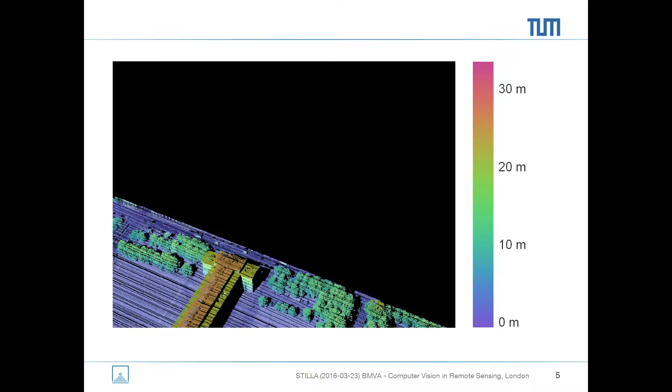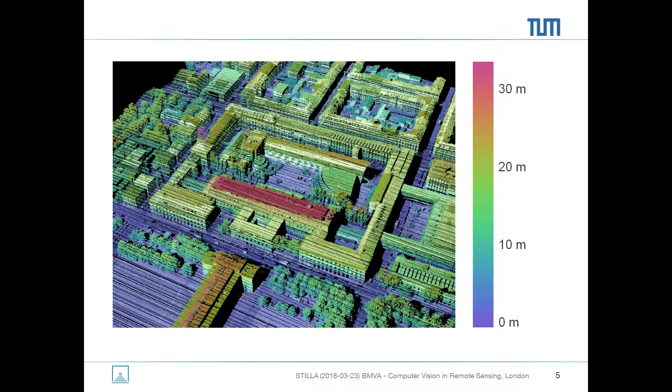The very special thing here, which is not very common in remote sensing photogrammetry, is that the laser scanner is not looking downwards in a nadir view; it's looking in a forward-looking way, which is typical for military applications, for example, obstacle warning systems. What you can now see here is a scan, and what we see is our technical university, and that is about the velocity at which we are flying over the terrain, and here different heights are color-coded. You can also see, for example, this is my office here. This is the window. It's my office.

Very interesting in this laser scan is that in the oblique view you are able to see the facades and the roofs. Facades and roofs. But the drawback is that you have shadows due to the oblique view. And now the question comes up, how can we fill this 3D point cloud? This can be filled by multiple views, by multiple flights.

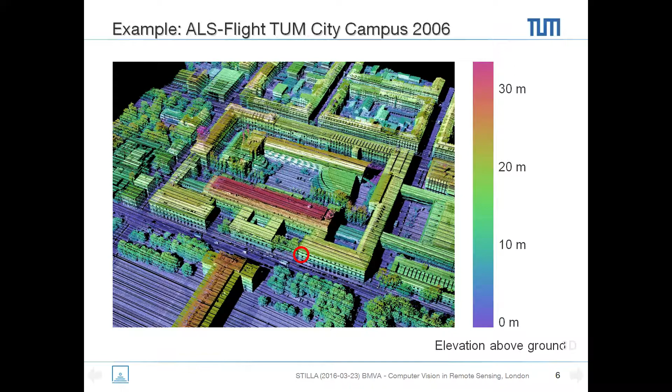We had here a cross flight from different directions, and if you have multiple observations, in this case four, then the problem comes up that they do not fit exactly together. And co-registration is very important for change detection. Otherwise, each change is caused by a point which is not at the correct position. You can see here the four flights with four different colors. That is the clock tower here on the left, and you can see a profile here. Here's my office. The profile from the building does not fit exactly together.

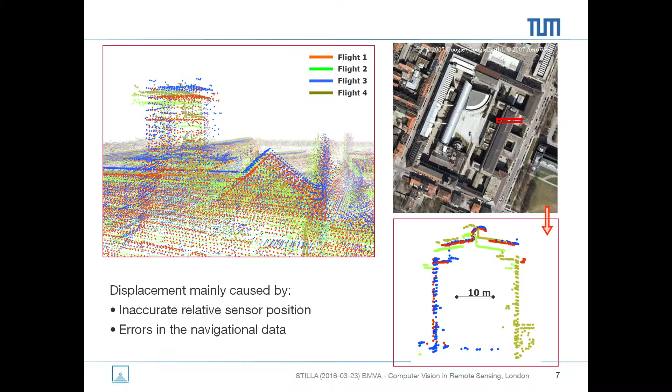So we are looking for methods doing an automatic co-registration from these displacements, which come from inaccurate relative sensor position, meaning from the sensors, IMU, GPS, and the laser scanner, and/or errors in the navigation data. So for doing this co-registration, we need some tie points or tie faces, and for that we first have to classify the scene. So what we are doing first is trying to find the ground level by a region growing algorithm, here in blue.

Next we are trying to find the facades and the roof structures. We try to fit planes into the roof structures by a RANSAC algorithm, and when we are not able to fit planes into the point cloud, then we know that's vegetation. So we have four classes, and these four classes are just for finding where the roofs, the roof faces, are.

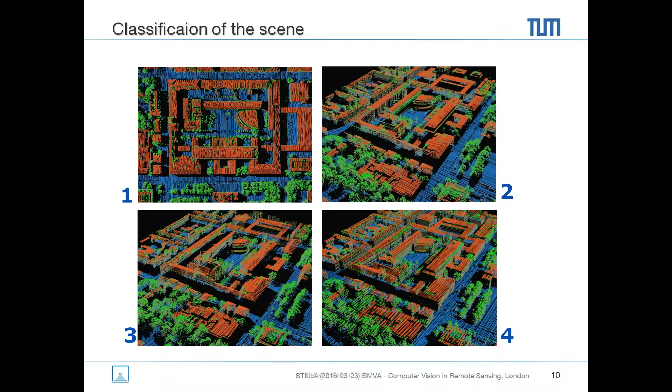You can see this for the 4 different views. You see that these are 4 different views because the shadow situation is different from the 4 flights. Now we are taking the roofs, and if you have 2 roof planes and intersect them in space, then you have a line. If you have a 3rd roof plane, then you have a virtual intersection point in space, and you can use this virtual intersection point as a tie point to combine with the other point clouds. That is done automatically, fully automatically.

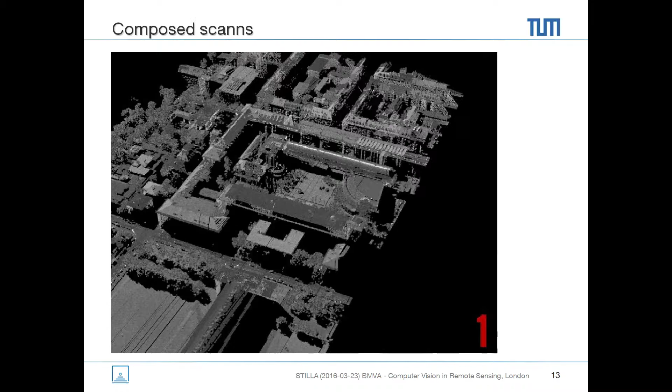So finally, you can see here the scan. The first scan comes from south to north. The next scan with the co-registered point cloud from north to south. Here the facade is missing. Here also some structures can be seen because it is a little bit side looking. Now here the facades are coming from west, and the fourth comes from east in this direction.

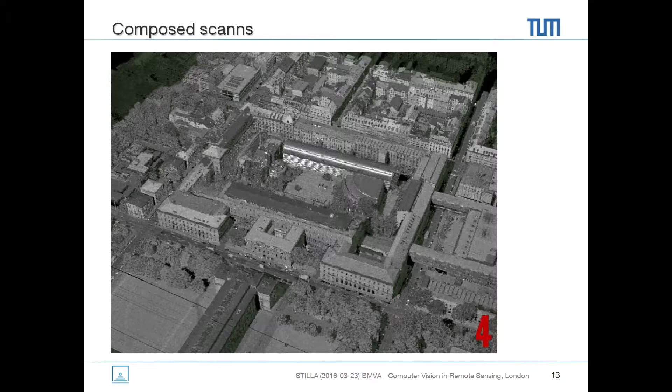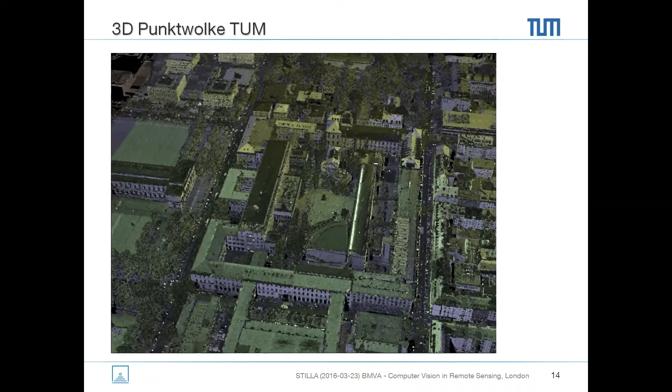Now you can see in the next scan we have a complete point cloud. You can also see the windows in the scene. So we are able to get such a point cloud, and you see different colors, points coming here from the different views. Here in yellow, and all the others green and light blue, the different colors. You're also able to look below the bridges here, and that is completely different from what we have in classical laser scanning.

So now let us assume that we have a situation that we have created such a database at time step T1, a not time critical situation. We have multiple scans. We do an automatic calibration of the sensor system during the flight. It's possible to do it during the flight. We have offline data processing, and we do a coarse classification of the scene into vegetation, buildings, ground, and so on. We have very good GPS data. We can also build up a reference station.

Now we have this database, and we are coming to the situation T2, probably after a disaster, or we have a special task, flooding, I don't know, fire, and we have a helicopter UAV mission. We have a forward-looking sensor, which is typically used for obstacle avoidance. We have degraded GPS accuracy, probably no reference station close to that. We have a scan line method. We are processing the data while it is recorded, more or less along the scan line.

And what we want to do then is the data alignment, and if we are able to combine the data of the second scan with the first data, we can also do an automatic navigation of the carrier, because we can use this co-registration data for navigation. So the final task now is a comparison, change detection. Typically, with classical approaches, for example digital surface models, they are interpolated, put on a 2D grid. That works best with nadir view because we have more or less no occlusions by the buildings. We can update maps and can compare point clouds, but all other information about the point clouds gets lost. I explain it in the next image a little bit better.

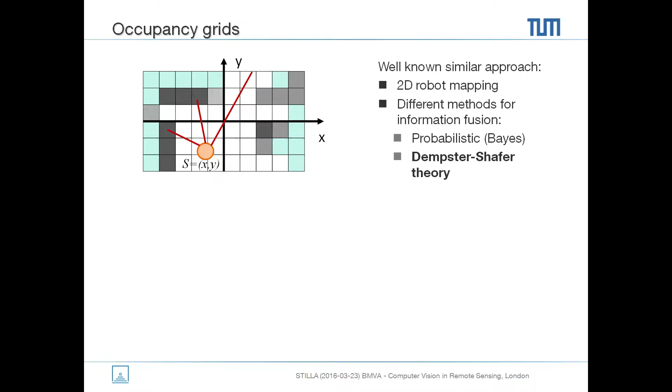We start with a so-called occupancy grid, which is well known from 2D robot mapping. There are different methods to use that. You can use it by a probabilistic approach. We have used the Dempster-Shafer theory to combine the information. And in contrast to what is done typically in 2D robot mapping, in our approach we are working in the 3D world. We have 3D grids, and the cell size is comparatively wide because we use the cells just for the search structure. The search structure I will explain in the next slides in a little bit more detail.

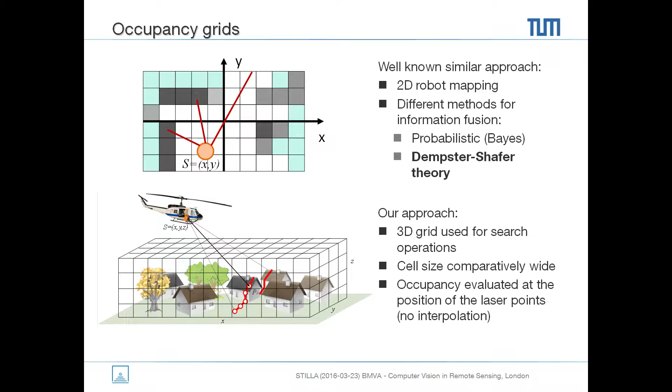We formulate it in that way that in case that we found a point, we have a certain uncertainty for this point, which is given typically by the laser footprint size, by the energy distribution, by the point position and accuracy, and so on. We can say we expect here an event, an object, a point, and we can also say that the way before must be free, otherwise we haven't seen that point.

So we have here a confidence for the empty space, we have a confidence for the point itself, and we have a confidence for what is unknown. All these other things are unknown. We can say nothing about that. So we are working with these three data sets, or these three states.

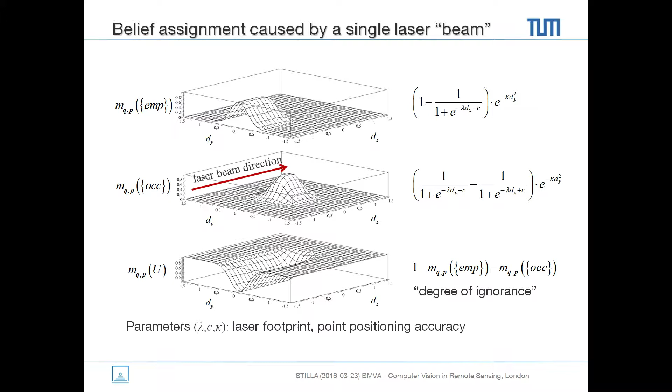In this theory, the Dempster rules of combination, we can combine different observations, for example, from two rays, without going in detail, in a very easy way. Because this theory delivers the combination and the fusion of these different spaces for the occupied space as well as for the empty and for the observations along the laser beam.

So we are storing a set of indices where there are laser points in these cells, and we also store the indices of the laser beams that traverse these cells. Both are just used as search structure to find other points. So we have index fields, and we know, in case that here is a point and another point in the same cell, then we have to consider both points in this theory. The same is given when we have different rays along this voxel, to find neighboring or intersecting rays more or less in space.

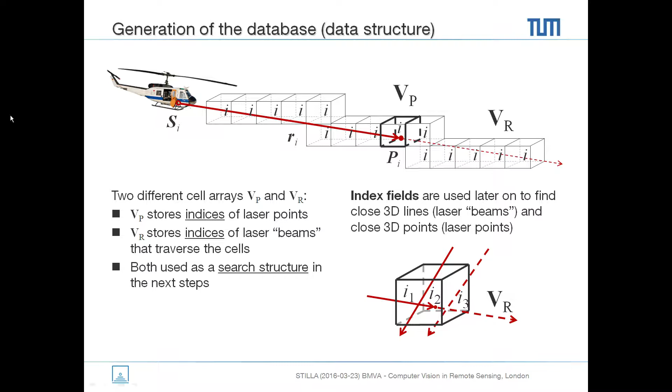The basic idea now behind is the following. When we have this search structure, we are formulating the change detection by conflicts. That means, in case we have seen a point by a sensor, and before this space was empty because in the first observation there are rays, then there is a conflict. When I see here a ray in the first observation, T1, then in T2 I see here a point, there is a conflict, we call that conflict type 1.

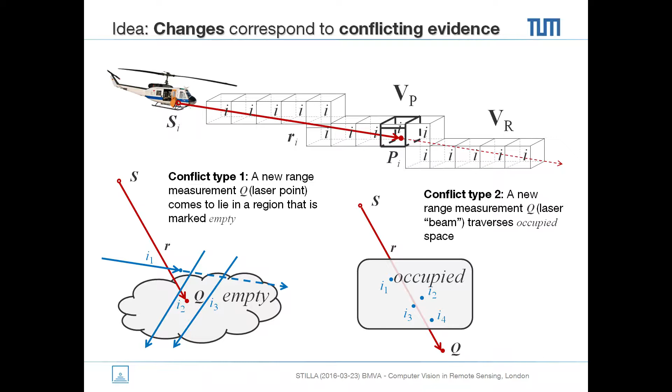Conflict type 2 is the following. We have seen an occupied space, a volume, but now we are able to see a point which requires that the beam has traversed this occupied space. So there's a conflict. We call this conflict type 2. The combination of the different observations is done by the Dempster-Shafer theory. I want to show that with an example.

We have 6, 7, 8 spots in Germany we use. One of my favorites is Abenberg, a small village, which was taken in 2008. In April, we have the combination of 4 views. We have 4.5 million points, and we have here a cell size of 2 meter by 2 meter for the search structure. 1 year later, but in August, we have a flight over this same terrain, and we are interested what has changed. And we have just 1.5 million points because we are on one flight over the terrain.

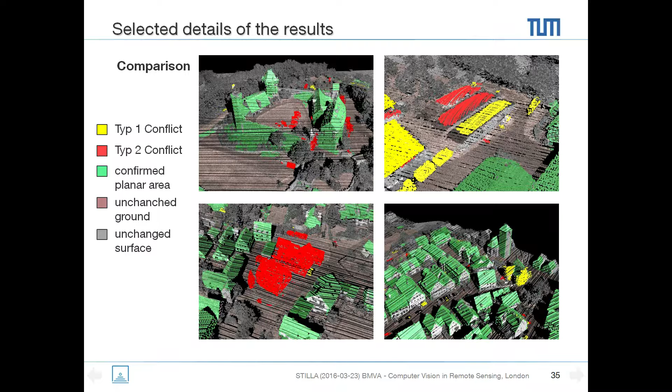This was the first example about change detection. We are on a level where we said we are not interested in an object, we are just interested in the changes in the point cloud.

So the idea behind that is this ProgressTrack, a research project. The operating sequences of a building project are extremely dynamic, and we have selected this issue to find and develop methods for the changes. Especially we have the difficult, predictable boundary conditions, the weather in the building project.

We have strong dependencies on single process steps, which is a little bit different to other manufacturing lines, for example the automotive industry. On the construction site, you need first this structure, then you can build the next structure. The acquisition of the actual construction progress is essential for cost controlling and organization of the further working schedule, and up to now these construction sites are manually inspected by a site manager and documented by a handwritten construction diary.

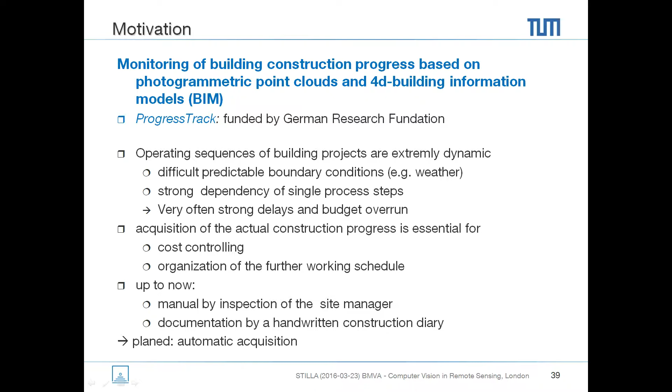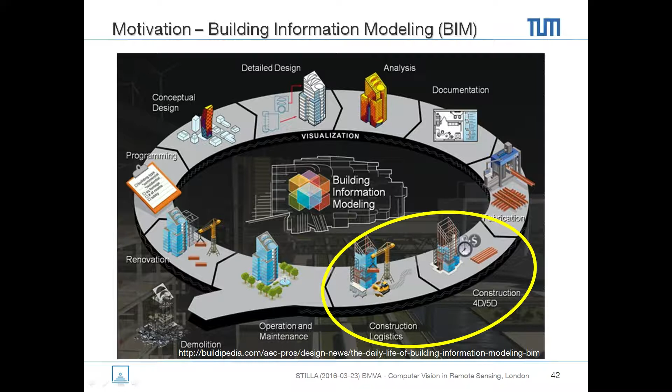What we are planning is an automatic acquisition. This can be seen in this life cycle of the building information model, which starts with programming, conceptual design, detailed design, analysis, documentation, fabrication. Here we have the construction and the logistics, and this is the part of the building model we are interested in. 4D construction means with time, 5D with money, and the construction logistics.

So we have on one hand a BIM, which gives us the as-planned state with a schedule, the 3D geometry and object attributes at a certain state, TI. At the same time, TI, we are able to monitor this construction site by photogrammetry: data acquisition, image orientation, dense matching, co-registration, so that we have a 3D point cloud.

Then we have to compare the 3D point cloud with the model. In case the comparison gives the result okay, then we go on to the next step. In case it is not showing the same situation, we probably have to change the schedule of the building construction process. I will show that with one example of what we have done in Munich.

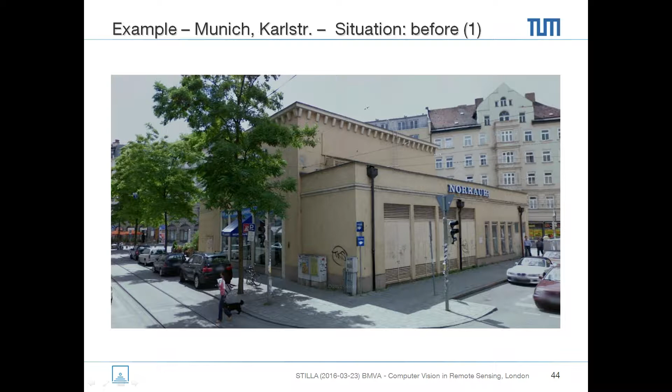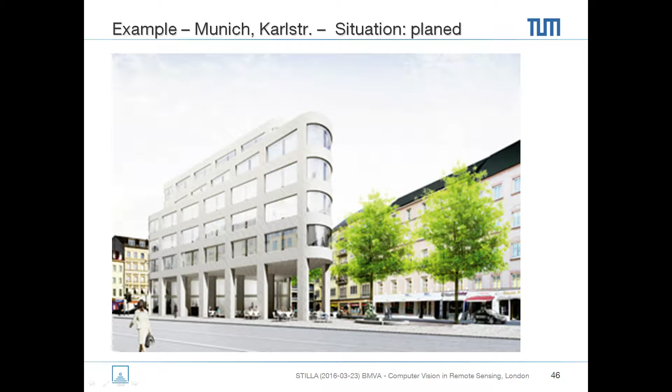This is a building very close to the main station, just a 5-minute walk between the university and the main station. Looks not very nice. You see here a different view. So I don't know who decided to build a new building here. And the architect's plan: here we need such a nice building. So they planned this building, and after some months they started with the construction. Means the old building is away, and they started with the ground level work.

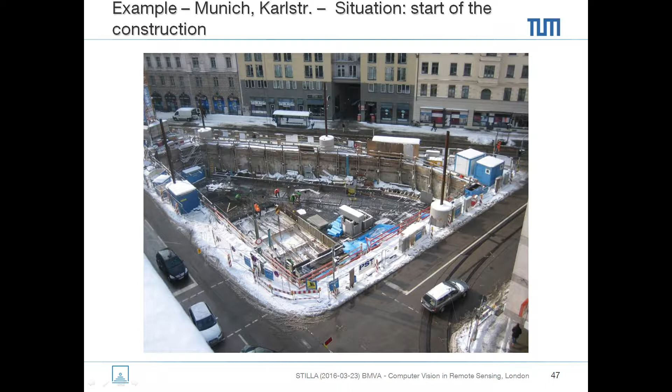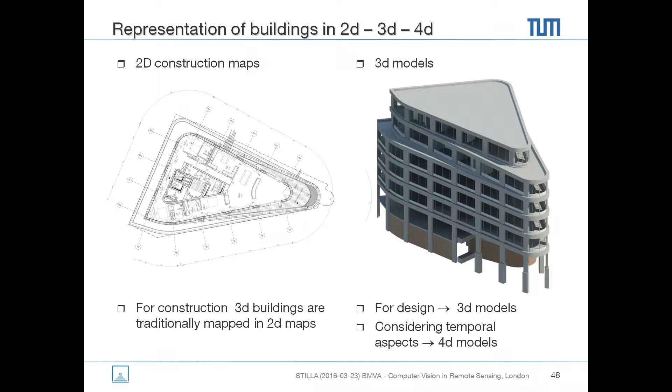Well, typically they are working on the construction site with 2D maps. So everything is on 2D maps. You see all the levels of the building for the construction, but the planning is done in 3D. So the question comes up, why not use this planning information, the 3D model, also for monitoring, and especially in case you have this temporal aspect in the design, you can build a 4D model. And typically this temporal aspect is given because there is a construction plan.

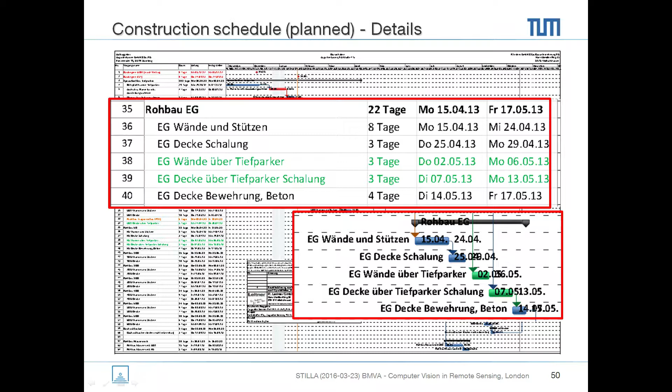This is in German. For example, here they need 3 days for the walls and for the parking deck, and it should be done between the 2nd of May and the 6th of May. So each part of this building model has a timestamp when it is planned to be built. So when you introduce this information into the model, you can create a model, shift the time in the model and say, okay, how does that probably look in September or in October? So each part has a time when it started to be built and when it's finished.

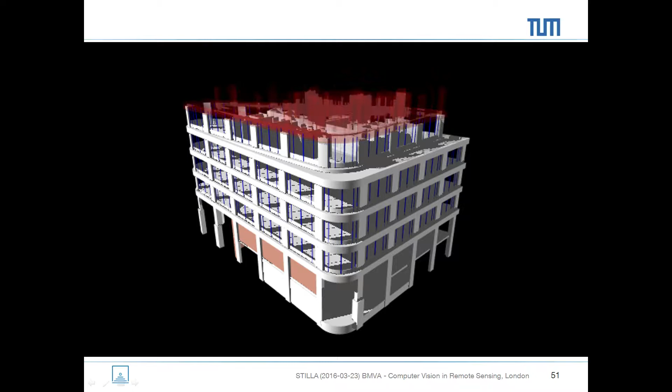Now we are coming to the computer vision, to the photogrammetric side. We want to do an acquisition of the actual state with cameras.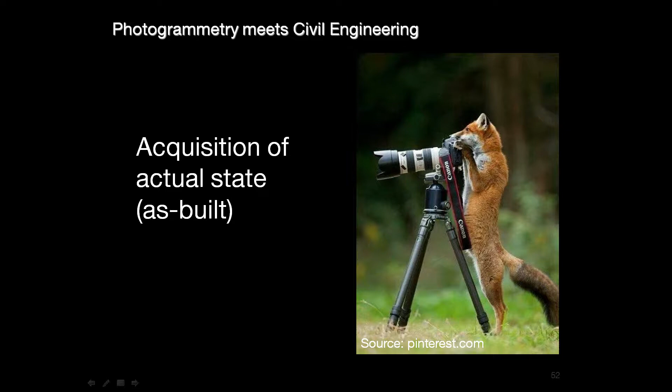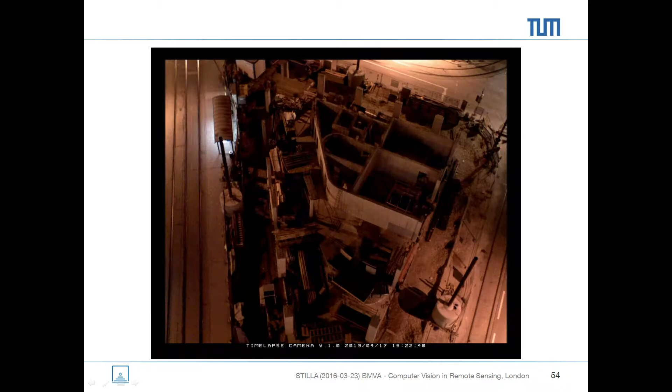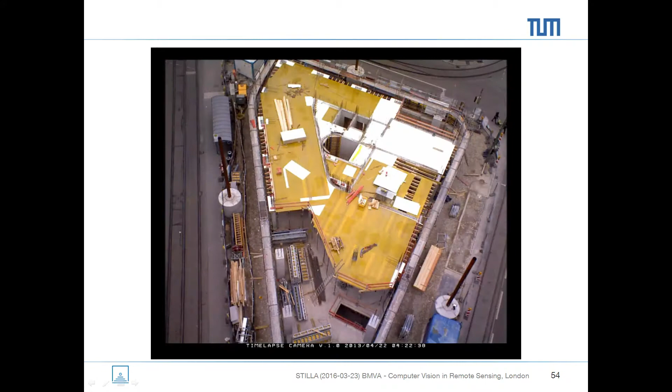An example is to mount a camera, that was our first idea, on the crane here at this position. What you then receive is photos taken every hour. This starts in April and ends in October in this video.

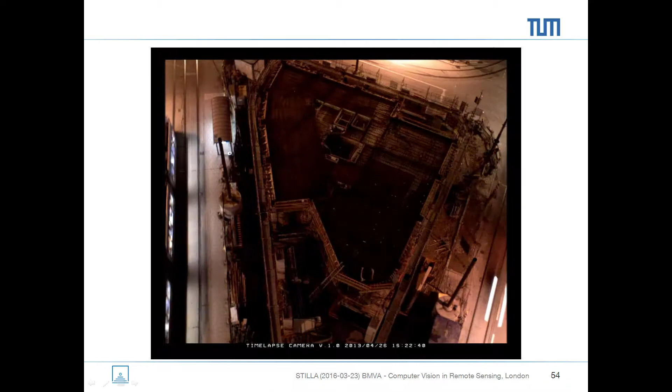But you can have one picture every hour and see the progress, especially for ground truth use. But what we don't have is the stereo information, and we want to create point clouds, so we need different camera positions.

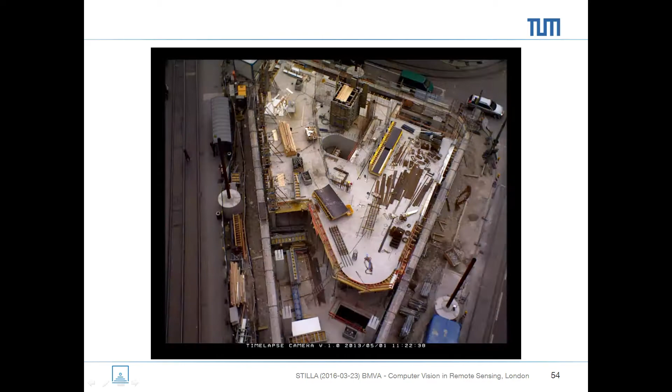That is the problem. If you come with a laser scanner to a construction site, they say stop, first we have to finish that, then you can do it. So when working on a construction site, they don't accept that you just take photos or scan whenever. What you have to do is queue into the line, and when it's your time, then you can do the images.

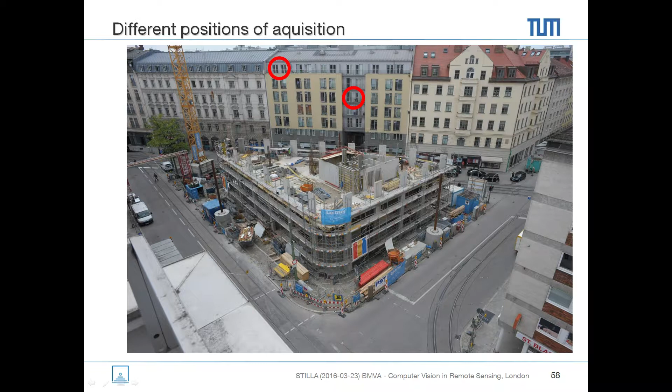So our idea was first to do terrestrial images of the construction site, and besides these, we also took images from the crane at different positions. You can see here images taken from different views at the buildings. The yellow circle shows the yellow image, the red position shows the red image, and the blue position shows the blue image, so we have acquisition from three different sides.

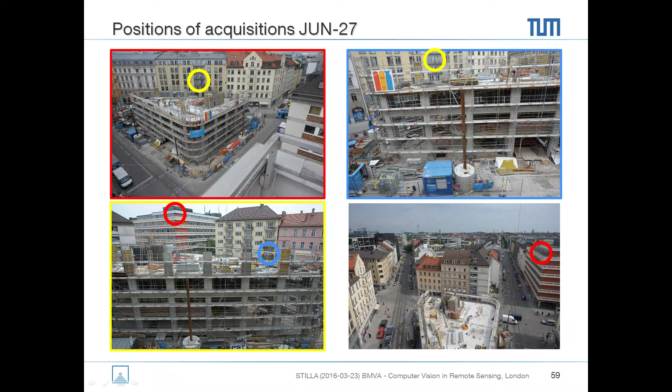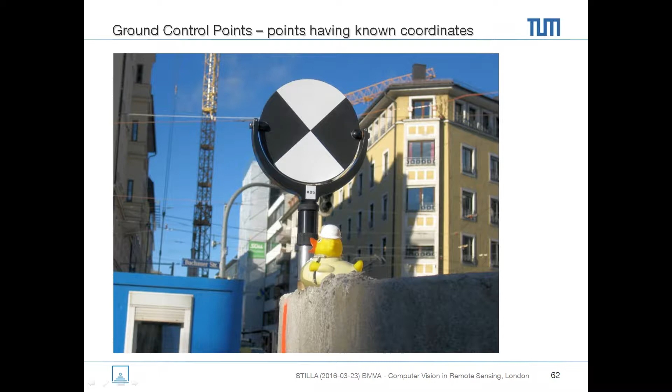We also took terrestrial images from the ground during the construction process. Then photogrammetry starts first by finding tie points between the images, and we also need ground control points, shown here, which were measured on the construction site and used as fixed references over the entire process.

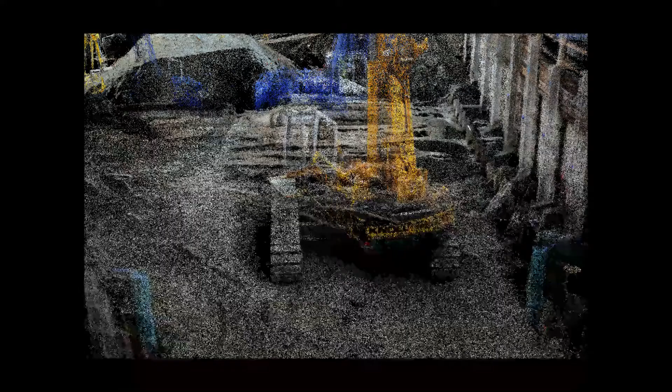The standard approach now is to do automatic selection of stereo pairs. From these stereo pairs, we calculate the depth value of each pixel by dense stereo, giving us depth maps. This is fused together with the ground control points, and finally you receive a point cloud taken from photos.

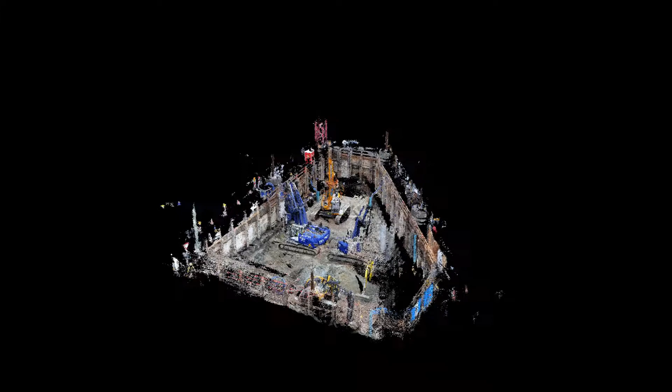This is a point cloud showing the situation in the beginning, a fused point cloud from different depth maps and different images. You can also have the same for different time steps, and I can show the construction situation a little bit later.

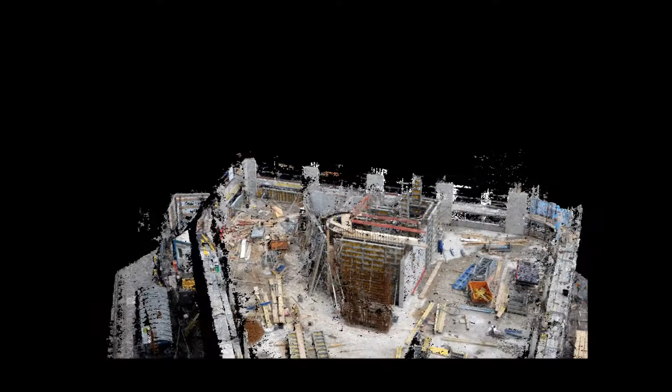You can also see that there are some holes here, not everything can be seen by the cameras. And so on, and so on. So the next step comes after this. Okay, so I stopped this video here.

Now the question comes up: what are the changes? So you have the situation of the building model at a certain state and the point cloud from the photogrammetry. Now to find the changes in between, we look at the situation for example for the 15th of May, or for the 27th of June, or the 25th of September, and so on.

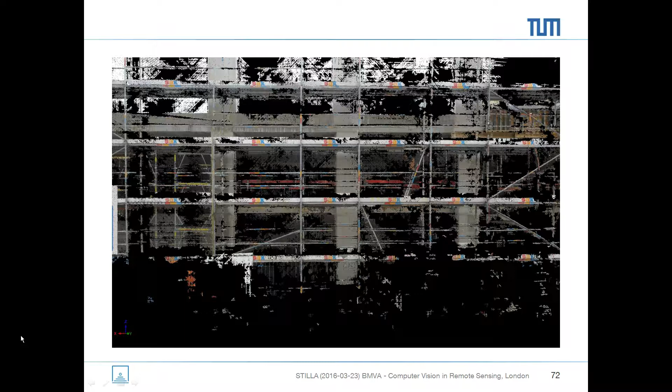I'll show that with a simple example from this ground view. This is what we get from the point cloud. And when I go now to this point cloud model, what we are trying to confirm is which parts are already built and which are not.

So what we are doing is a rasterization of the object planes into 10 centimeter tiles, and we try to find for each tile whether it is already built or not, with a point density of about 2 centimeters and a sigma of about 1 centimeter precision of the points.

Without going into detail, there are some confidence values for the building parts, indicating how confident we are that a certain object is built. Finally we can accept that or not, and all the results are fed back into the building information model.

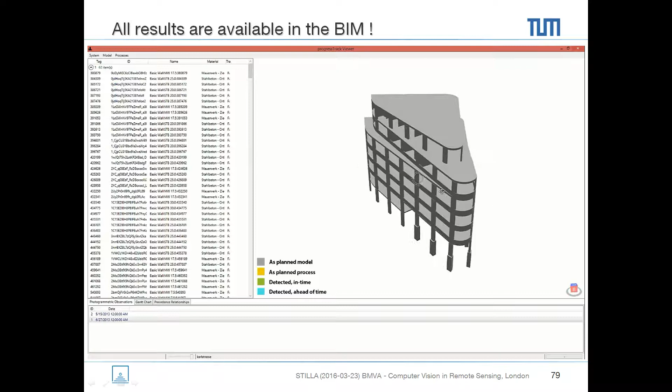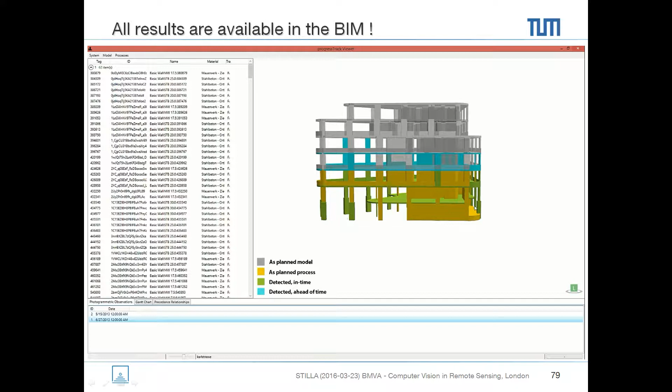What you can see here, with the time slider, is gray as planned, yellow as planned process, green detected in time, and blue detected ahead of time. So blue was ahead, green was in time, so they were a little bit faster here at this stage, faster with these objects, but at the end, probably due to the weather situation, they ended up exactly on time with the building.

Everything is covered. One problem addressed here is scaffolds in front of the building, so we did some research to automatically extract the scaffolds from the point cloud and remove them from the other points. There are also other ways to handle this, because the problem is that we have mostly terrestrial views, and not at all positions can we go around the building to take photos.

So the idea came up to use acquisition from the air, and for that we need high resolution. We thought about using a UAV for this. So probably you can start it here.

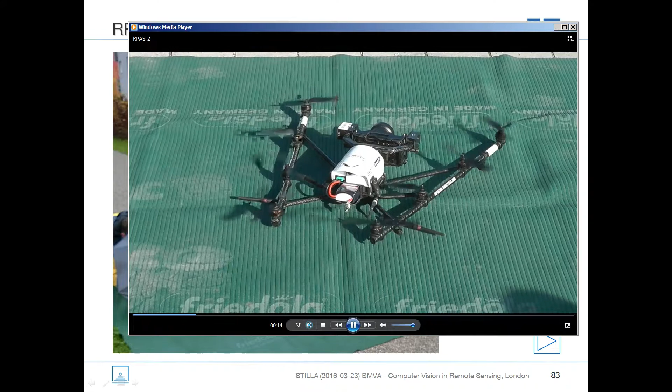It's difficult a little bit with the crane. If you have cranes and you have a UAV, you need to make sure there's no collision with the cranes during the acquisition.

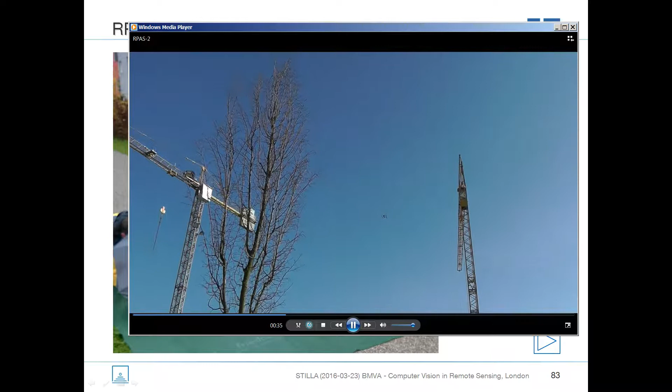On the construction site, this is a different construction site in the south of Munich, a kindergarten which is built here. The best time to fly is when they don't move the cranes, so on Sunday.

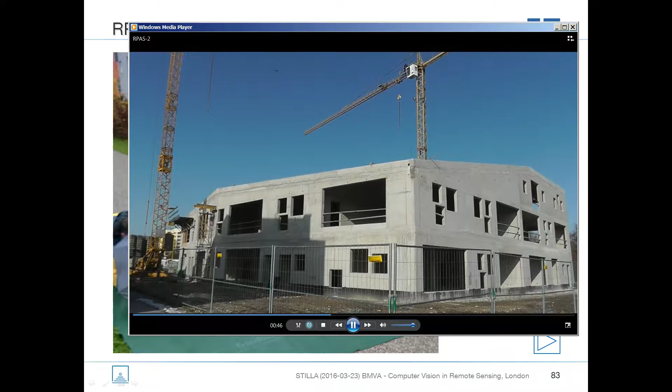I can stop this video landing. You see the UAV is working here. It takes about 5 to 10 minutes, then we have all the images which we need.

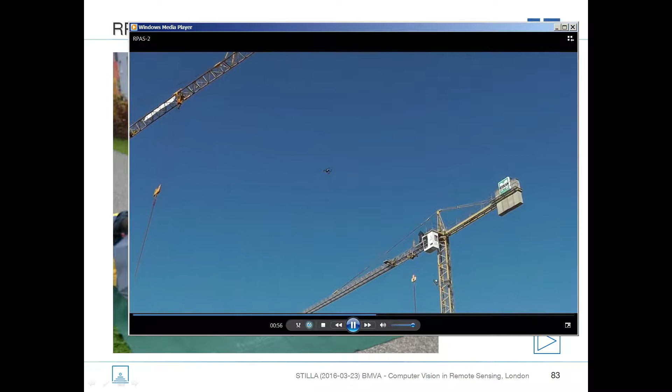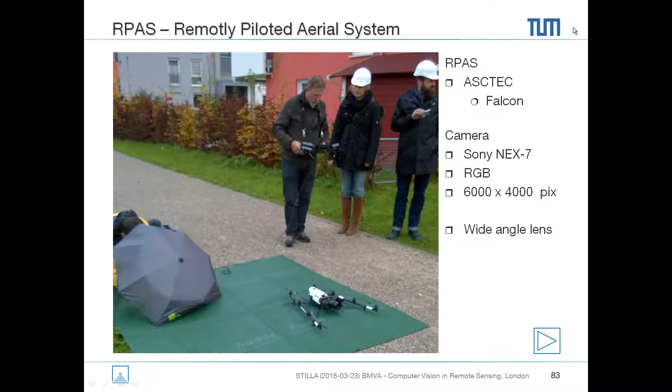What we can see now, stop that. Now the mouse, right click that here, going back.

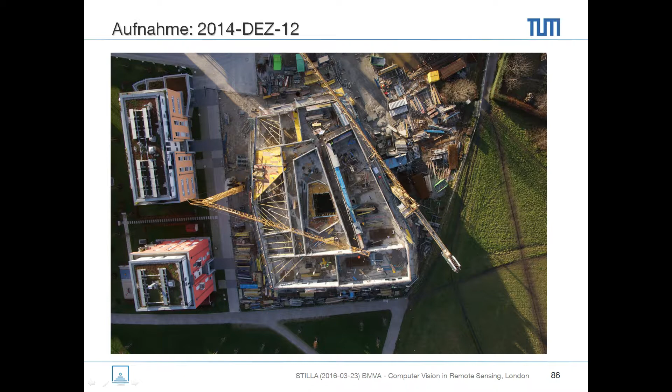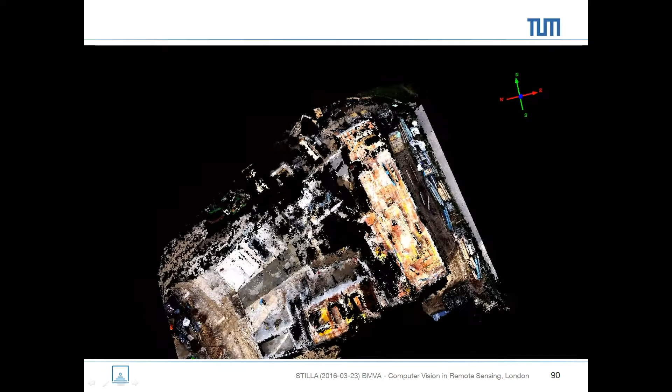This is what we see from the UAV, and you see also here the construction situation at a certain time. Here a different situation, also taken from the UAV, and what we finally receive from these different images is again a point cloud showing this construction situation at a certain stage. Here you see a different situation created from the images of the UAV.

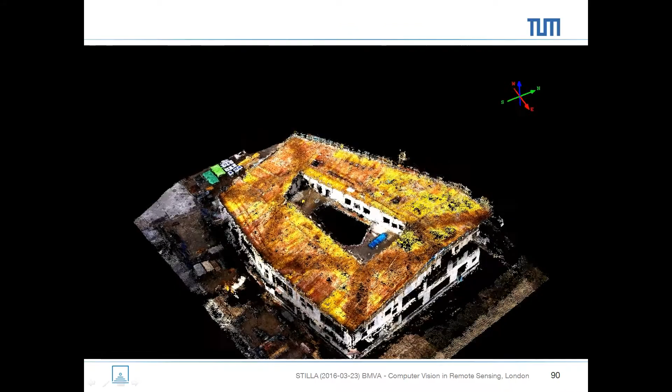The next idea comes up: in some cases it's difficult to operate with a UAV, probably in inner city areas, where we have no permission to use a UAV over the construction site. Why not mount a stereo camera system on the crane? One idea is to put that on the crane stand.

The stereo system was our first idea. Or instead of putting that on the crane stand, we can put it on the crane jib, because the crane jib is moving over this area. So this was our idea, and we decided to mount it on the crane jib.

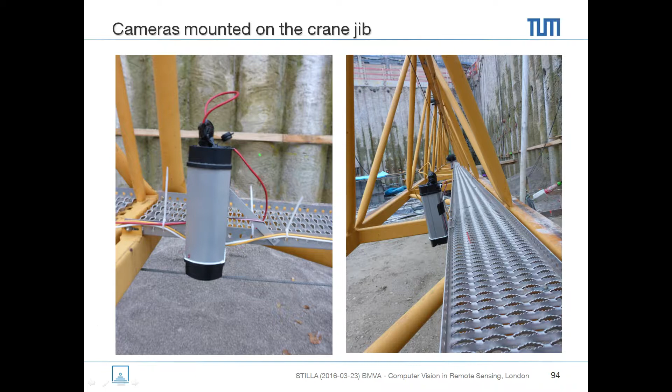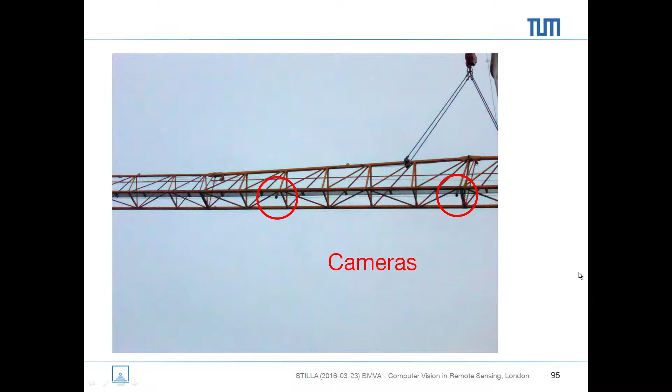Here you see the stereo camera system. The first camera is here, the second camera is here, and this is a situation where you can see the cameras on the crane. Here the crane jib is put by mobile car crane onto the main crane. Here on the left are the cameras.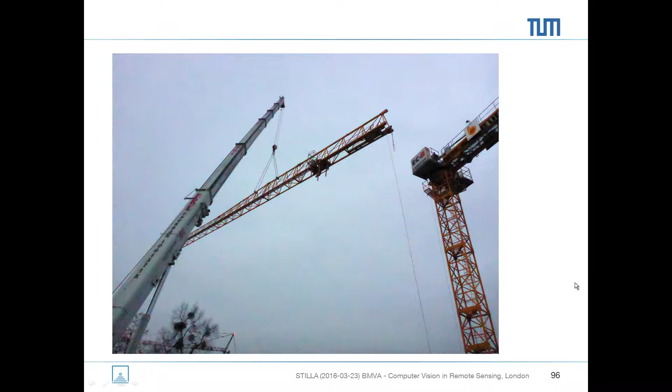So what you see from the camera is something like this, from one camera. You see only a part of the construction site, but due to the fact that the crane is moving, you have different acquisitions, and you see more. This is a point cloud that was reconstructed from the acquisition.

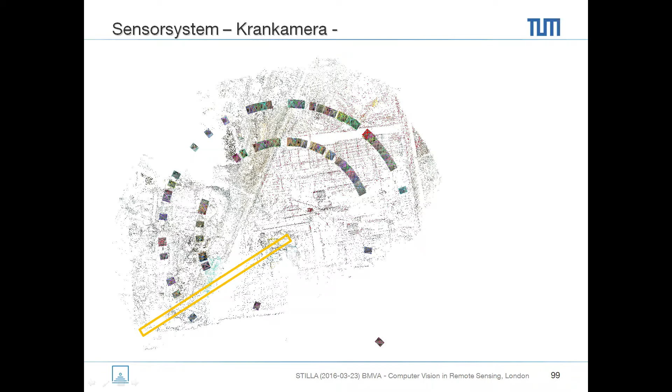You can do stereo between these two fixed stereo cameras, but you can also do stereo between these other cameras. So we have multiple ways to do the reconstruction and intersection of rays, which you can see here, for example, in this situation, with the cameras.

Again you are able to reconstruct a point cloud from this, the third construction site that we have. The third construction site is the hospital of our university, a new building, part of this hospital, which can be seen here with this color of concrete, track of concrete in 3D.

Again the question comes up in this construction site: we have considered the visibility of objects in the same way we have done it in the beginning. That means we have to know which object parts we are able to see, what has changed, and what definitely we have no information about.

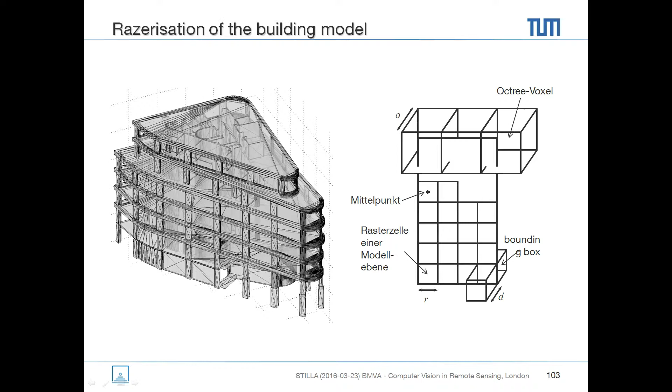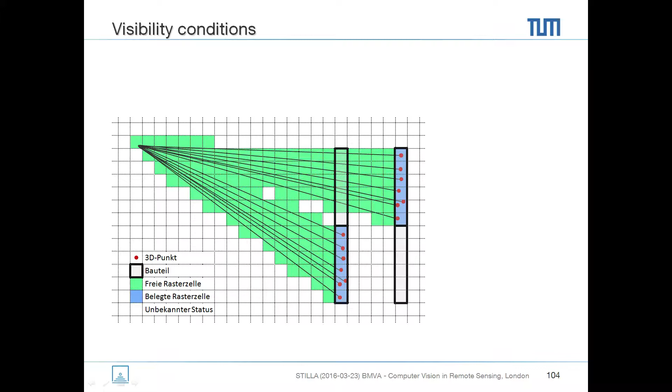So a similar approach is now done or programmed, where we have these octree voxels describing the entire building, so that we can create a visibility map to say this part of the building was seen, so all rays from this camera to this part show free space. We know there is nothing, definitely. Here we see nothing, that means we have no information about that. We always have 3 states, and these 3 states are important for handling the problem.

This shows, for example, here in green, which is free, and blue, which is occupied, and in white, this is unknown. Photogrammetry and remote sensing are not magic.

In general, we have used 3 different ways, and we are investigating the ways with the terrestrial handheld situation, the mobile airborne with UAV, and the mobile static views from a crane camera to explore that. I think I have some minutes to say something, about 5 minutes, so I will use it.

You have heard now about point clouds, from camera, and from mobile laser scanning, but I talked in the beginning a little bit about radar. So I want to just show you 2-3 slides about radar. In radar we have the problem that the side-looking geometry is a must.

We have typically the situation that we have shadow areas on one hand, on the other hand we have this layover situation where we have a signal mixture. Especially in urban areas it's very, very difficult to reconstruct the point cloud from this aircraft. What we have done is the following.

We have used a multi-antenna system with 4 antennas, which has 28 centimeters here on aircraft, and we have different flight paths, meaning multi-aspect. We are able to look from different views so that we can fill up the shadow areas on one hand. We have redundant data, which allows us to decompose from the mixed signals the individual scatterers, by a more or less tomographic approach.

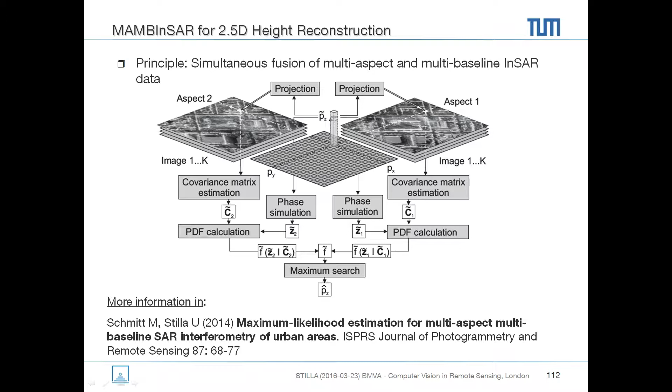We are calculating the covariance matrix and doing estimation. We do a phase simulation to a probability density function, and we do that for each observation in this stack, and we select the best situation, the most probable situation for a height, which leads to a 2.5D height map looking like this.

We have about 15-20 centimeter by 30 centimeter resolution. And the point cloud is much denser compared to the LiDAR situation.

Very interesting talk. Are there any questions?

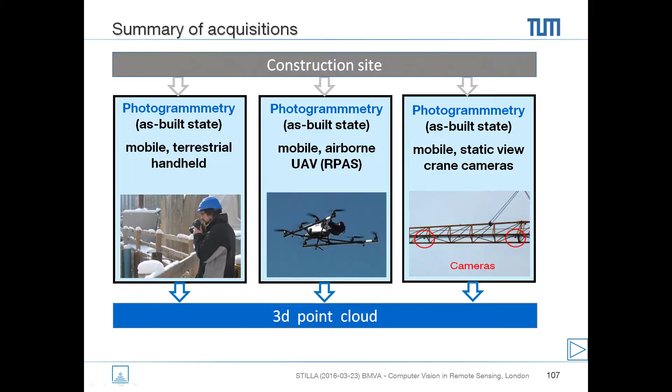Because I could understand there'd be quite a lot of noise, and I think you hinted that there were some challenges around the matching process to determine whether there is something physically there or there isn't, or whether it's noise. What kind of criteria did you use for matching the model to the... First of all, what we are doing is, probably I have here a hidden slide showing the situation.

Going back to the construction. Sort of halfway through, I think. Yeah, so here. That's even earlier. Oh no, I have deleted the slides. It's not a presentation, doesn't matter.

What we are doing is an error propagation. So we know how precise a measurement is when we have 2 rays. At least we need 2 rays for 1 point. And so with this error propagation, you have different acquisition situations. You can say, okay, here we need a higher tolerance than probably here, because this was taken from different views, and if you have 2 rays that way, then you have a larger error compared to if you have 2 rays in that situation.

So we consider the errors from the observations, and these are average values. We can also have probably here 3, 4, 5 centimeters and use that for the matching process. And for example, one problem is here. You see, this is concrete, but this part here was not detected because on top of this part there is this wood. Because it's a different material, it makes a big difference. And this is about this distance, so this was not detected. So we can also say we don't know whether there is any concrete inside or not.

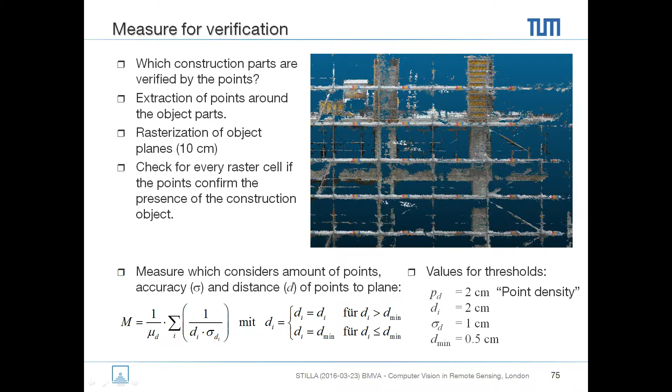Sure. Okay. Interesting. Okay. One more question? Yeah.

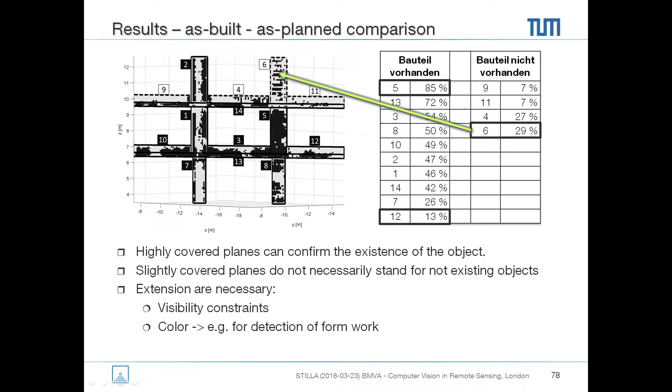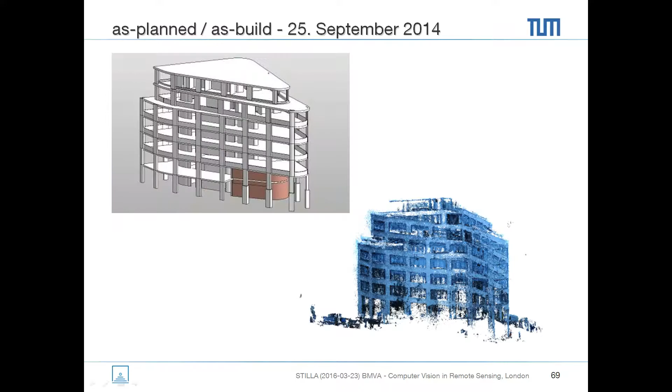You talked about the use of the airborne laser scanner, the forward-looking laser scanner, in non-time-critical situations. Can you comment on its use in time-critical situations? Maybe on the spatial scale or the rapidity of generating those data? This is exactly what I have shown in this situation. A time-critical situation has 2 issues. I'll go back. So,

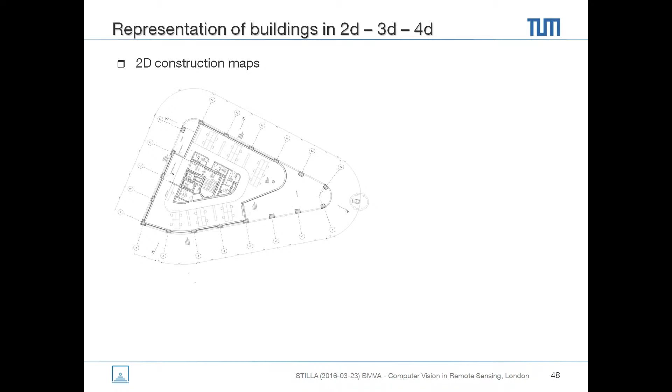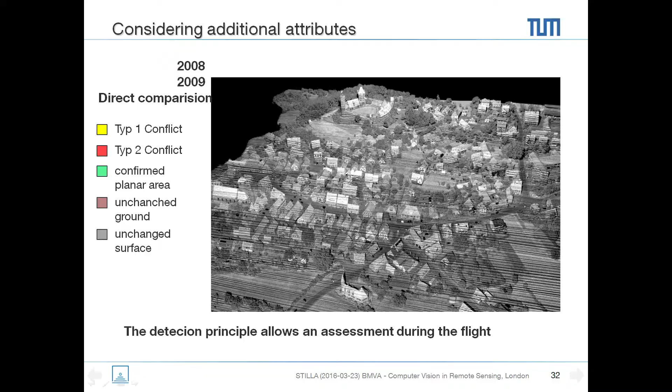now we are coming to the point cloud. And this is exactly the situation that we have when we have the first flight over the terrain. In this situation, we assume that we don't have this high-precision GPS information. We have no reference station. What we are doing is the following. In the beginning, we have seen that the matching process for different views is done by these faces from the roofs, and they are matched. And this is exactly what we do here.

During the flight, we are doing a matching of the roofs, because these roofs are constructed step by step. That means if you have a part of the line, you combine this line with the next line and the next line, and if you have a face, then this face is matched with the sensor. So by this matching process, you get your own position, your orientation parameters. That is done during the flight.

We are not comparing the entire point cloud of 4 views with the old 4-view point cloud. What we are doing is, in one stream of the scan, we compare and match this view, what we actually see, with what we have in the database. So if you see, for example, the small changes, that shows it must be very, very precise. And I have also a list about the quality.